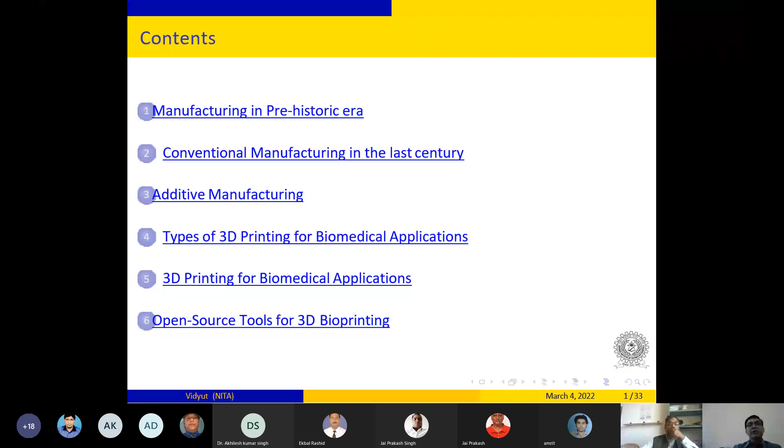So these are the areas that I will be covering. Now, let me go to the next slide. Next slide shows what? To a layman, it may appear that, yes...

I want to say, sorry to interrupt you, sir. Sir, if any of our participants have any kind of doubt, can they ask in between or at the last? No, I think you just note down things and we can have a discussion at the last, because we are having a time constraint also. So let me finish my part, then we can have a discussion as long as you want. Okay, yes sir, we will. Thank you.

Yeah, thanks. So to a layman, whatever I have presented here would appear to be a bunch of stones of different shapes. Yes, truly they are. But all these shapes that I have put up here were very, very significant if we go back a few thousand years.

Now, when man, what we call today as Homo sapiens, tried to convert from quadruped to biped, instead of crawling, they started to stand on their two legs. They were able to utilize their other two limbs, which earlier they used to crawl with. Now those two limbs had become free, and since this Homo sapien was physically weaker compared to the other animals present, in order to survive, they tried to utilize the other two limbs.

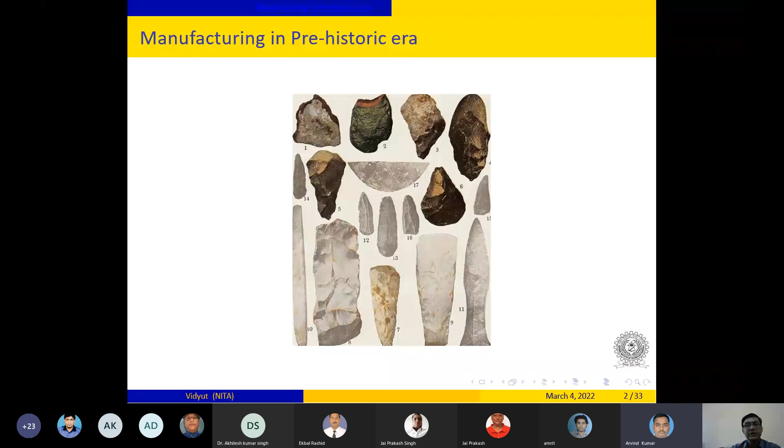Now today we know that bone is a natural composite, a God-made composite, and we are trying to utilize the technology of how bone is formed, such a wonderful composite. Knowingly or unknowingly, man realized during those ages that the bones of these animals could be used for their purpose. So the art of manufacturing had started from that era.

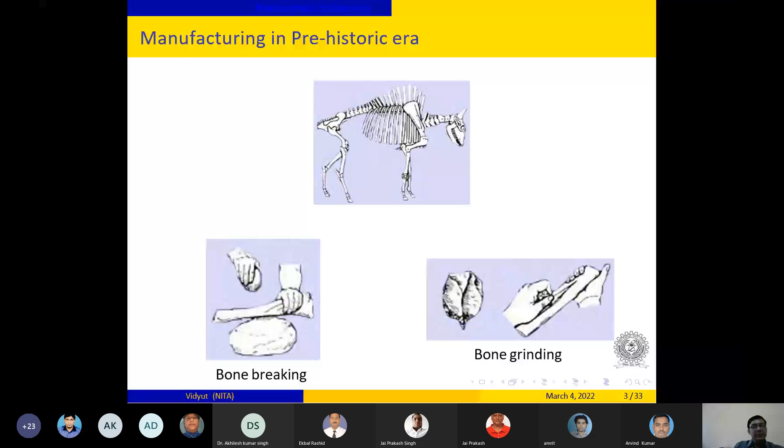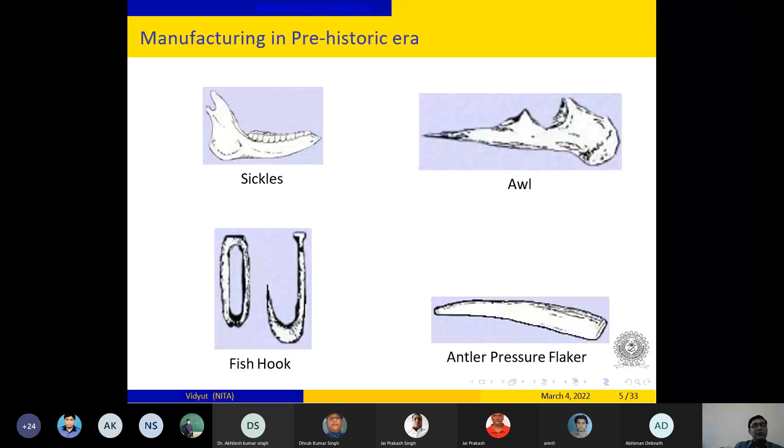Now, all this that we have talked about till now is something we have seen in the Paleolithic age. The entire era of our history can be divided into the Stone Age, which can be further divided into the Old Stone Age, the Paleolithic age, and at the end of the Paleolithic age comes the Neolithic age, where the rudimentary tools used in very crude form during earlier ages were now being shaped into better tools with the capacity to be made into different features or commodities. Here comes the end of the Paleolithic age, and then comes the Neolithic age.

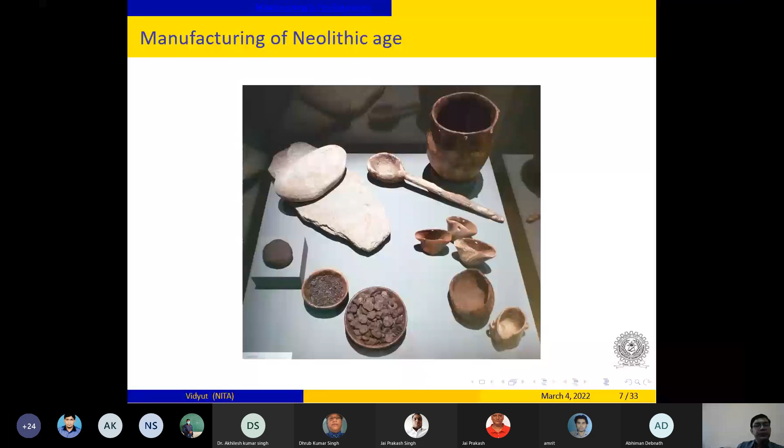Now, when they were using these potteries and using fire to harden them, somehow, somewhere, we do not know at the moment, but they have come across metallic ores, which might have looked like stones initially. When they were building fire, some of these stones might have melted and flowed. As we know well, man is very inquisitive.

He has the ability to think and analyze and question why it is happening, how it is happening, when did it happen. Since these questions were in his mind, he might have noticed and realized that there are some particular varieties of stones which, when subjected to heat, melt. And this molten metal again solidifies. This was the idea which he utilized into what we call modern day castings.

Now, in this slide, I have shown the first and most rudimentary shape of a metal casting. This is the amount of metal which might have accidentally melted and solidified into a crumb. So this is it. Now, then he started imitating that.

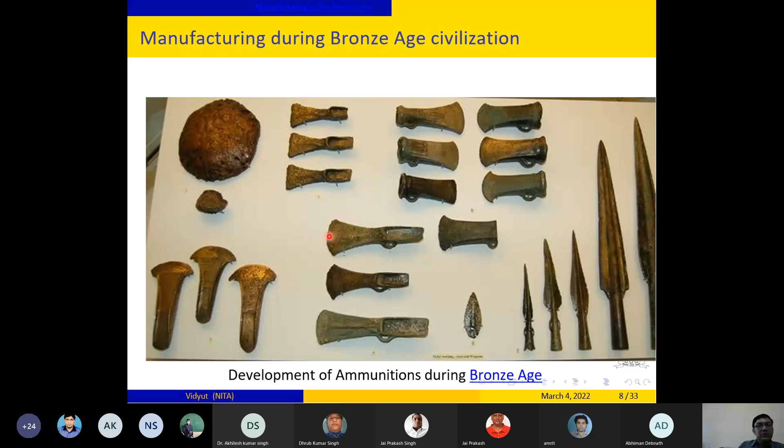Now, the casting of the Bronze Age would give way to wrought ammunition in the Bronze Age. That means after utilizing castings for thousands of years, he learned that the castings he used to make would break. So it was brittle. Somehow he found that if the castings were heated time and again and beaten, hitting, heating and beating, that is hammering, it becomes very strong.

And that is how he learned the art of making swords. I have a picture showing Bronze Age ammunition, how they used to make swords out of bronze. They used to be weaker than iron swords, but well, this is how they used to make them.

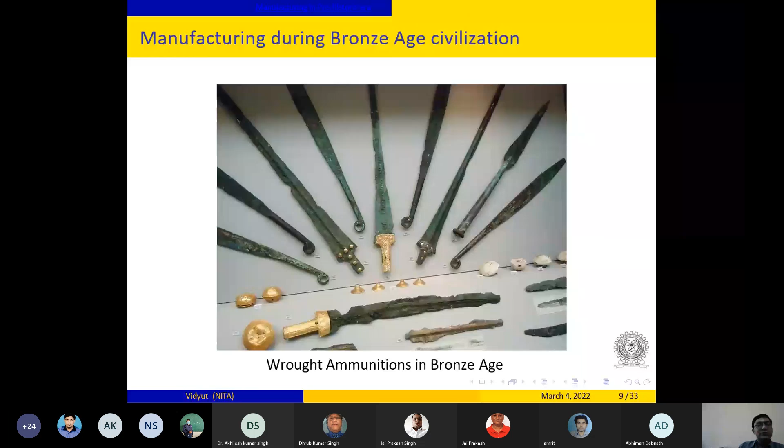Not only did they learn the art of making swords, but they also utilized metal for their own day-to-day purposes. What would be these day-to-day purposes? See, this is the day-to-day purpose.

So man is no more dependent on stones only. He has got the art of melting and pouring metal, and he has also learned the art of hitting the metal, and that is what we call forging. So slowly, if we talk in today's terminology, he has learned casting, he has learned metallurgy, because now he is not only using pure copper but has learned to make alloys by adding zinc and tin into it. That is how this is called the Bronze Age.

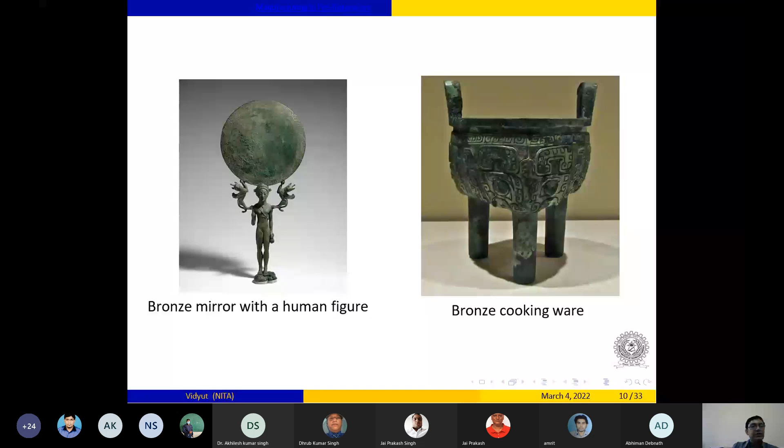Over those years, our country has also seen marvels in this casting technology. Where do we see this casting technology, in which form? Let us see in the next slide. This slide shows us two photographs. One is Kaliya Daman, a mythological story that we all know, which has been converted into a figure, cast as a bronze sculpture. Both of them are bronze sculptures - one is Shiva and the other is Kaliya Daman.

These date way back to 2500 BC, and if man could cast such a complicated Shiva statue out of bronze, you can imagine to what level the castings were available during that time. It has been said that India learned the art of investment casting, which we learn today in our class books, during that time. These types of statues were made using the famous lost wax process or investment casting, as we call it today. By this process, we know that very complicated shapes can be formed.

The Kaliya Daman that we see here is from the Chola dynasty, that is from Tamil Nadu. And the Shiva figure that we see here dates back to the 10th century AD, and this has been recovered from some part of Bihar, the erstwhile Bihar.

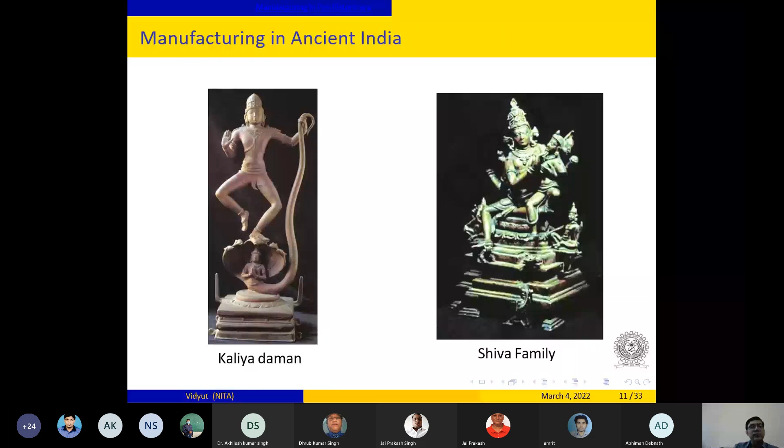Next, we see two statues: one of Lord Ganesha, another of Lord Nataraj. The Ganesha is from Kashmir, dating back to the 7th century AD, and this is again from the Chola period, around 1100 AD. That means from the BC era, before the Christian era, to this age, 1100 AD, so after that - how man has progressed from these mere stones to such intricate and complicated shapes.

Now, all of these are related to castings only. But as I said, casting is not the only technology that was developing. Along with casting, there were many other things developing, and one of that was forging. That means you heat something, cool it, heat it again, cool it, and when you keep repeating this, metallographic or metallurgical changes take place inside it, and it becomes very hard.

So not only was the man dealing with bronze and bronze related material, but he found another important material which is called iron, which was stronger, which was abundantly available, and he learned to tame iron as well.

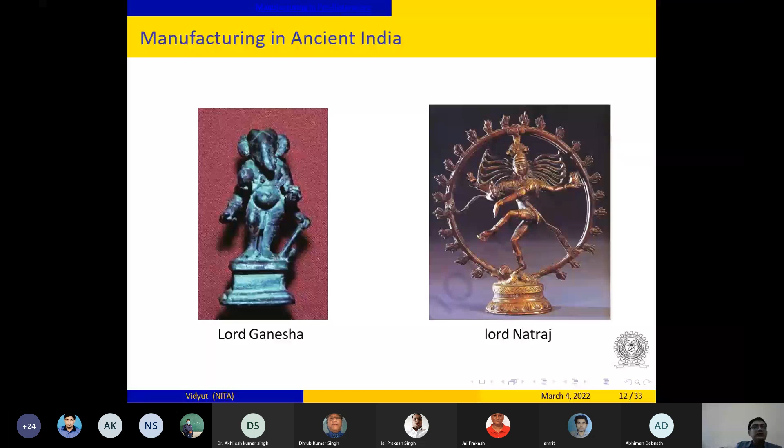Next, I'm going to show you something which people today still wonder about. What do we see? We see the famous rust-free iron pillar at Delhi. This iron pillar is said to have been manufactured during 400 AD. Till date, people are wondering that it does not have any rust. It didn't rust till today, and we know how polluted Delhi has been over the last 20-30 years. In spite of that, it is not rusting.

So people have done lots of research on this, and they have found that it has got an extraordinary corrosion resistance power. Over 1600 years, it did not face any rusting, though we know the temperature in Delhi soars as high as 45 degrees centigrade, and it is very cold as well, but it is still sustaining all these atmospheric atrocities, and it's still not getting rusted. So we Indians had developed metallurgy to the extent that we could develop something which was not getting rusted.

Apart from this, this is the most remarkable feature on exhibition to all people. But there were many such artifacts made which over historical time have perished, got lost, did not get prominence. But this one is still there. Now, lately people have studied the metallurgy of this type of iron pillar, and they have found that it contains very high phosphorus and absolutely does not contain any sulfur or manganese. It has got high quantity iron, and very high phosphorus without any sulfur and manganese, which is bothering the metallurgists.

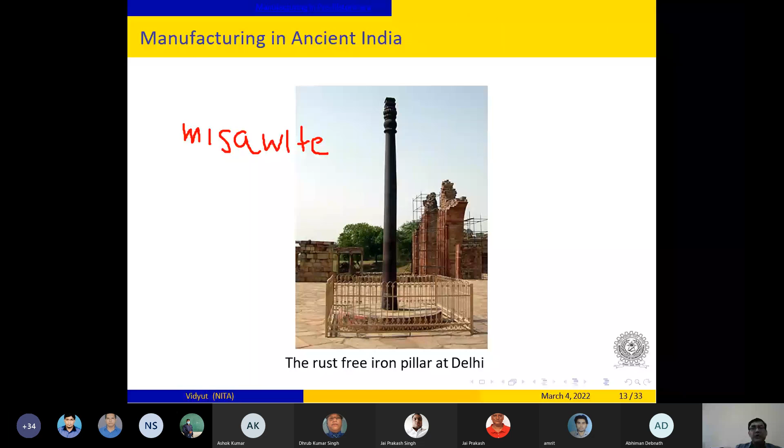Such a wonderful discovery to this date. But I wonder if the metallurgists of 400 AD had intentionally developed it so that it won't rust, and that is how it was made into a monument and kept. So definitely, it is not that we are only learning new things now. I can also say that we had learned things, we have forgotten them, and we are relearning them at the moment.

Now, having said all these things, let us slowly come into the engineering aspect and try to see things in the present context. So historical things we have seen, many things we have seen. Now in the present context, if we talk of manufacturing process, we can say conventional manufacturing process and unconventional manufacturing process. In conventional manufacturing process, we have the formative type, where we are melting metal and pouring it into molds of particular shapes, which takes the shape we popularly call casting. Next is what we call the subtractive type of machining.

What we do there is take initially a larger piece of material, then find that this is too large, too big for my purpose, and then remove material from it by machining, which we popularly call machining. But the prehistoric man was also doing the same thing - he used to take a big piece of rock, then with help of other rocks, chop it off and turn it into a shape which would be handy for him. Similar things he used to do for bones as well. That means the machining we do today with help of a machine, removing material - the idea was there in his mind during those periods also. Maybe he was not doing it with help of a machine, he was doing it manually, but material removal was there. Next popular process is called the joining process, fabrication process, which we popularly call welding and soldering processes.

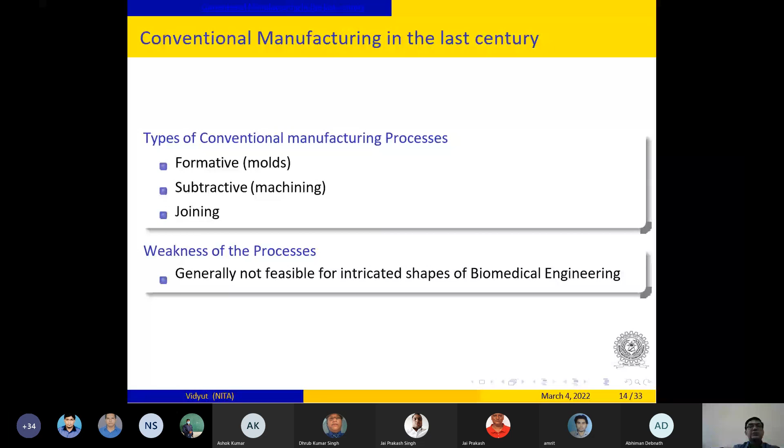Now, from the 1980s onward, we are developing another type of manufacturing which we call additive manufacturing. All the manufacturing we had learned earlier was conventional manufacturing, which was mainly subtractive. But now we have learned to make additive manufacturing.

Additive manufacturing means what? We will be starting from scratch - starting from dust, starting from powder - and slowly joining these powders together to make something big. So in manufacturing, we are going all the way around. We start from material, we melt it, and we make big things. That is one way out.

Next, we have a big thing and we are removing material to make it small. And then there is another way of thinking where we start from powders and convert them into larger things. That is what is called additive manufacturing.

Now, in this additive manufacturing, we will be developing these 3D structures layer by layer. That means as we keep adding one layer after another, slowly and slowly, a large thing will be built up.

Now, how are these additive manufacturing processes done? Well, there are different methods. These additive manufacturings can be done for metallic materials and for non-metallic materials. We will keep our discussion confined mostly to non-metallic materials, because non-metallic materials are easy to melt. In this process, melting would definitely be there, but not the way metal is melted for casting - here it's in a more controlled manner.

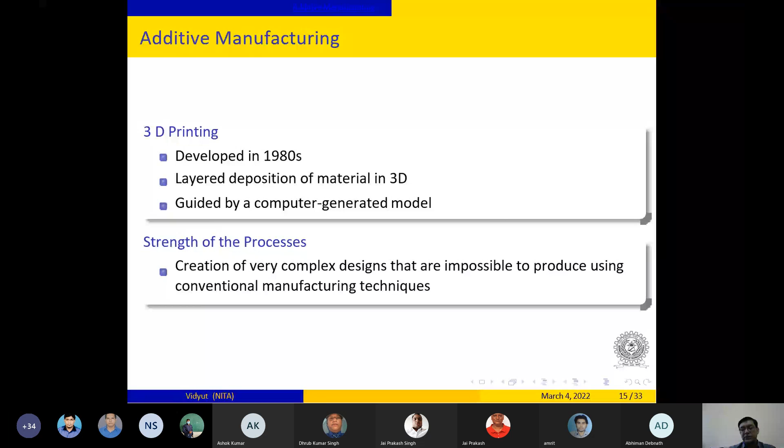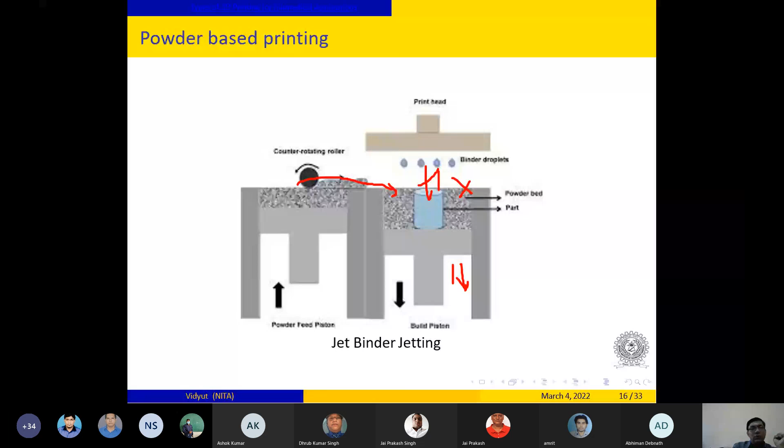Here, in this slide, we are telling that the powder itself can be joined not only with help of glue, but they can be heated and they can be fused. So what are the methods with help of which this can be done? The first method we call as thermally fused selective heat sintering. Thermally fused means we are using some heat, and with that heat, the powder material will be fusing together.

And this joining together is generally called sintering. So we would be sintering the material. That means sintering in what manner? Say I have got a tray and I spread the tray with powder like this. The entire tray is spread with powder and I heat the entire tray. Then the entire powder is going to solidify.

But I do not want the shape like this. I want the powder to solidify in this particular manner only, in the form of an L. If I want the powder to solidify in this manner, then I have to ascertain that the powder of this vicinity only is getting heated up. The rest of the powder should not get heated up. And that is how this powder is only going to melt or sinter together.

This is one way out. How am I going to heat it? Maybe I have to use a heat source. What can be that heat source? That heat source can be laser.

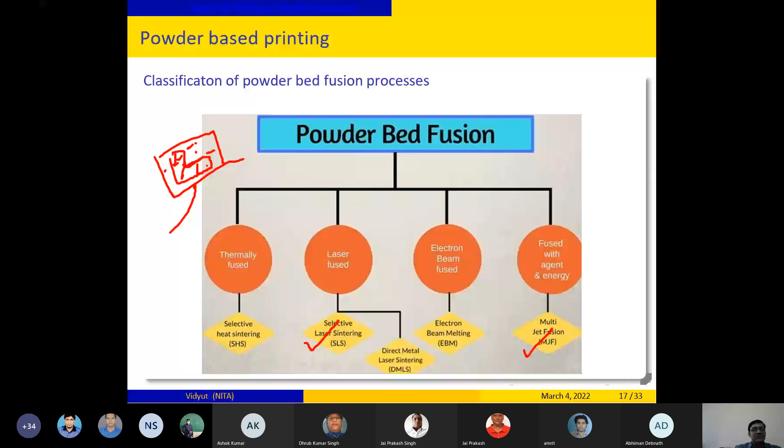Now, to give a more schematic input, we will take up selective laser sintering in a slightly more detailed format in the next slide so you can visualize what is happening. This is what is called selective laser sintering. What is there in this method? Similar to the method we had earlier seen, where we had used a laser head. This is the laser head which is going to give you the laser beams. Now again, we are having powder.

So this is the example of what we call selective laser sintering. In a similar manner, we can use electron beam melting also, but the only thing is that electron beam melting has to be carried out in a vacuum chamber.

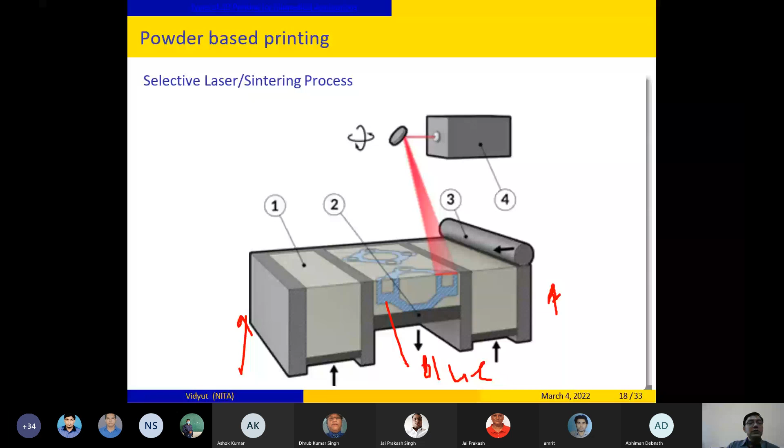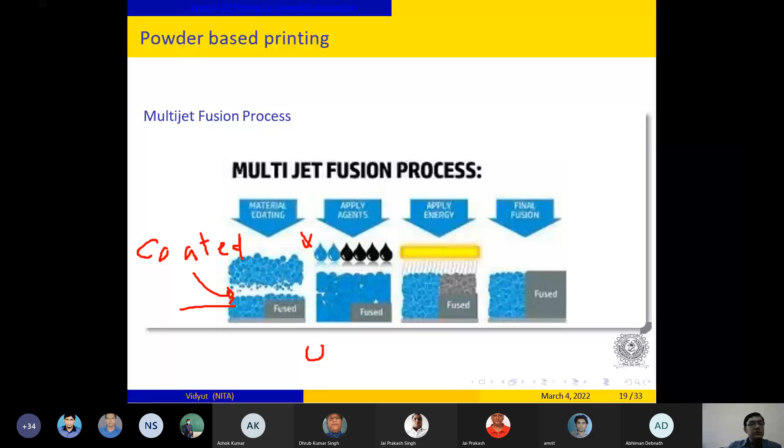Finally, to give more strength, we can use some energy, either heat energy or light energy. That means what we are doing here is getting into a curing process. So I can take adhesive coated particles, add adhesives to it, and then use some energy. This energy can be heat energy, or this can be light energy.

How does light energy join materials? Light energy is added so that a chemical reaction occurs in presence of light, and due to that chemical reaction, bonding takes place.

So we have a process where we use multi-jet onto these particles, and then with help of either heat energy or light energy, we sinter them, and that is how we get this fused block. This is the classic example of what we call the multi-jet fusion process.

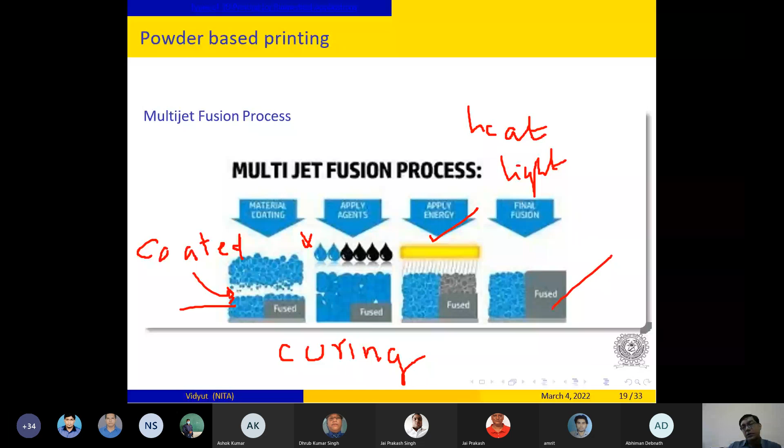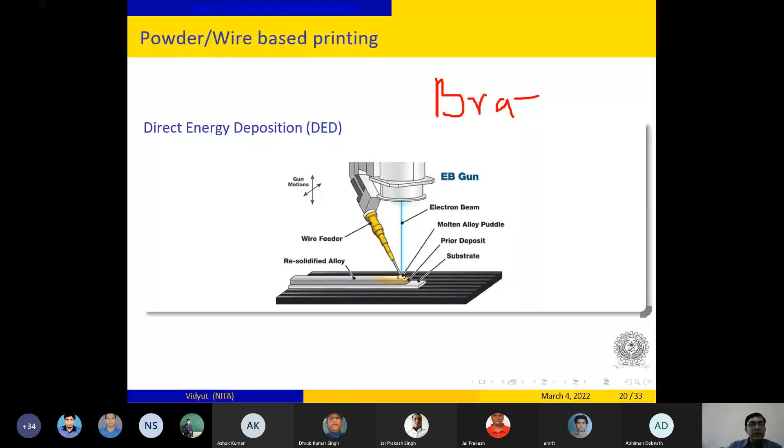If you have seen brazing, it is done in a more crude fashion. In brazing, we take a brazed wire, or we call it a brazed rod - a rod made up of bronze, in different combinations.

We take two mating surfaces, and keep that rod in between. Then we take a gun with oxyacetylene flame, and with that blow gun, we give heat to it. The brazed rod melts and fills into the cavity, solidifies, and holds the two parts together. That is called the brazing operation.

A similar operation can be done here, but instead of using an oxyacetylene fuel source of flame, we use a very precise and minute electron beam. This precise beam falls onto a wire, and the diameter of the wire will be very, very small.

It will be at the micron level, very thin. Also, it is important that the heat falls onto this wire, and the diameter of the electron beam that forms should be even less than the wire, so that the beam can land on a particular portion of the wire and melt it in a very controlled manner.

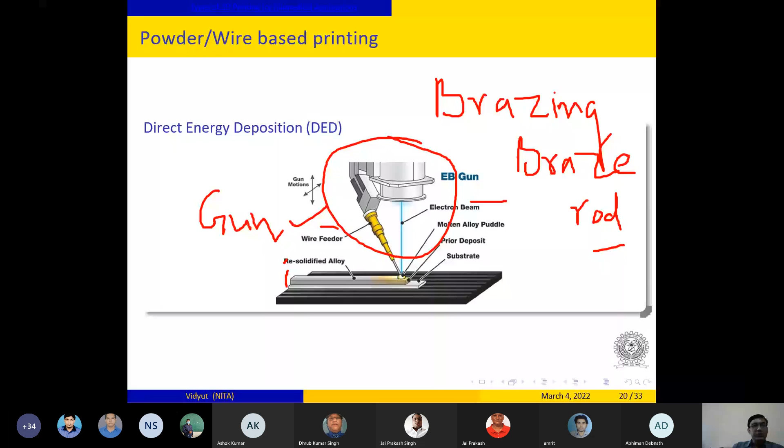So both of these are called direct energy deposition - meaning with the help of energy, whether you take material in the form of a wire or powder, it can be directly deposited onto a substrate, or without a substrate, built from scratch, layer by layer, by properly maneuvering the head to generate complicated shapes.

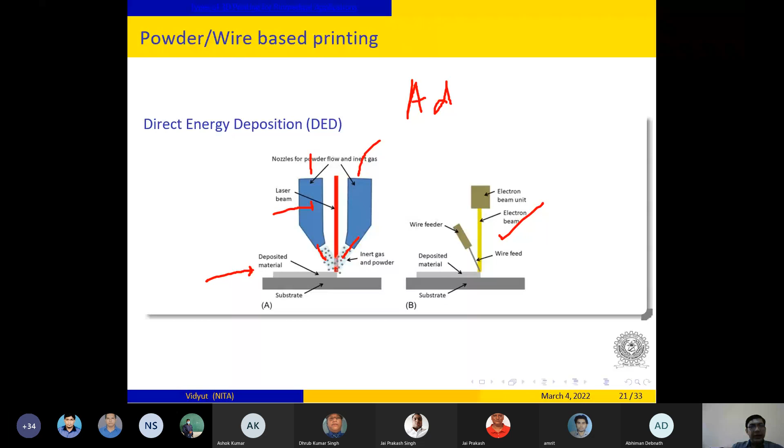If you do it with the electron beam, you can do it in an inert atmosphere, away from oxidation troubles. These are some of the techniques utilized in what we popularly call additive manufacturing - the name comes from ADDI, additive. You might be laughing at the way I write additive manufacturing.

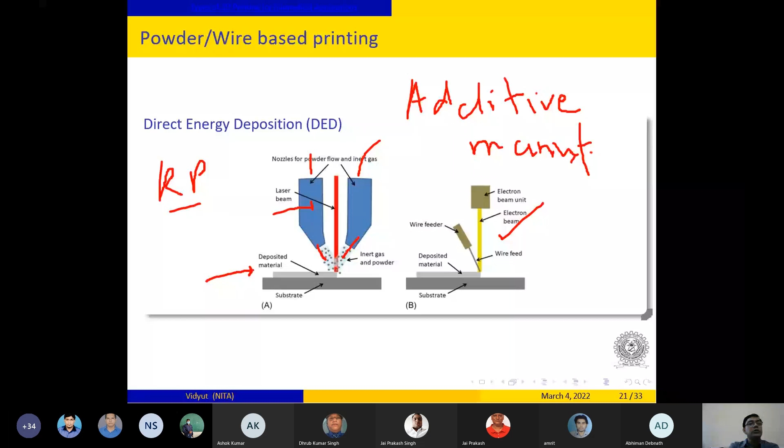Having gained knowledge about the basics of manufacturing from the prehistoric age to the modern age, we have come across conventional manufacturing, where we mostly use subtractive methods, to the latest one, additive manufacturing, where we add layer by layer. Now that we have gained so much knowledge, where are we going to use it? We are going to see how this knowledge and technology can be utilized for biomedical applications. Let us see.

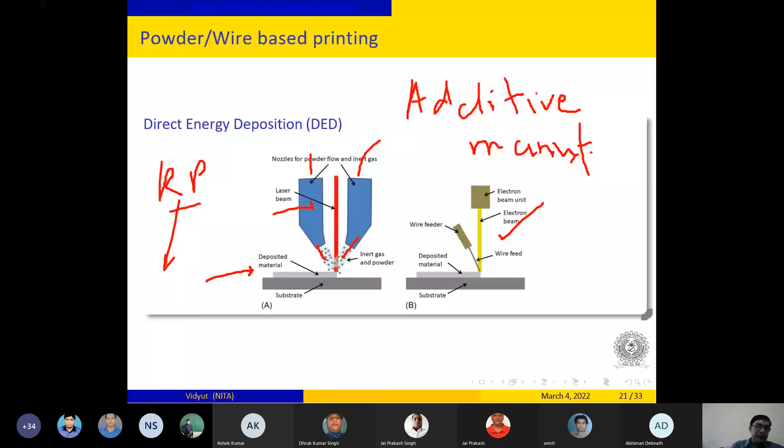If I want to print this slide that we are seeing here, we would switch on the printer, give a command, and the ink stored in the printer cartridge would be sprayed over the white paper such that wherever there is a dark area, there will be a line. Similarly, we get the entire sketch replicated onto the paper. This is called 2D printing - we get everything in 2D.

How about getting something which would be slightly elevated? That means one layer after another is going to happen, and then we get the real product. Whatever we get as a real product, we give it 3 dimensions - length can be drawn on paper, but we also have to give it height. So it becomes 3D. 3D printing has to be done.

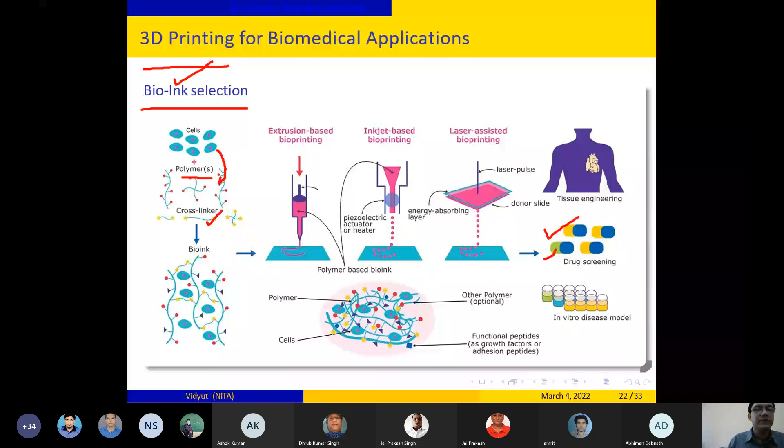Next thing is that, as I had been talking, we will be using the live cells. So when we are using these live cells, that means tissues, we are going directly into what we call tissue engineering. Say for instance, I have to manufacture a human organ. So definitely I have to use the live cells. But how am I going to bind them together? I have to use a biomaterial. And if I have to give it a particular shape, then again, what do I have to use? I have to use an RP process. All right, let us see how we are going to use that.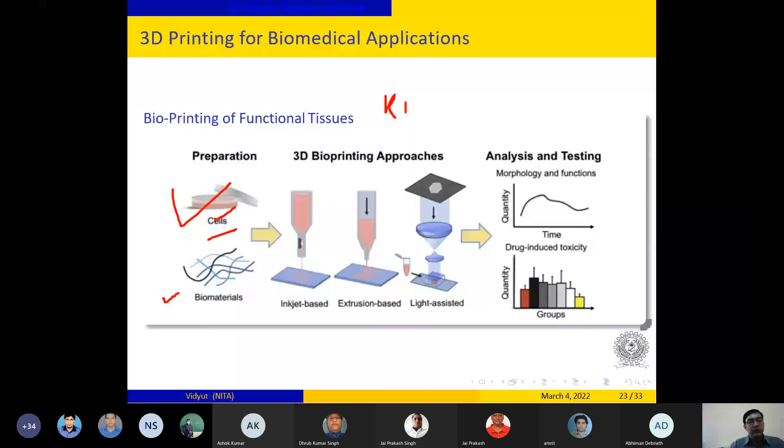This is the slide where we want to manufacture this organ. Let us say we want to manufacture a heart. So what we are going to do now? We take this heart and then we will be creating a 3D profile of that heart. How can that be done? This can be done optically, this can be done with help of MRI, this can be done with CT scan, computer tomography, magnetic resonance imaging, and also optically.

So we convert this into what we call a 3D CAD model. With help of this 3D imaging, we grab all the dimensions. Once all the dimensions of the human heart are known, I can generate a similar thing in a 3D CAD model. So I have a CAD model. There may be many tools, I'll talk about those in the next slides, but with help of those software, I can generate a 3D heart.

And then this is to be machined. Those of you who have taken courses in CAD/CAM know that in order to move the machine in a particular manner, we have to use G codes. So these dimensions would be converted into G codes, which will be utilized to move the head across.

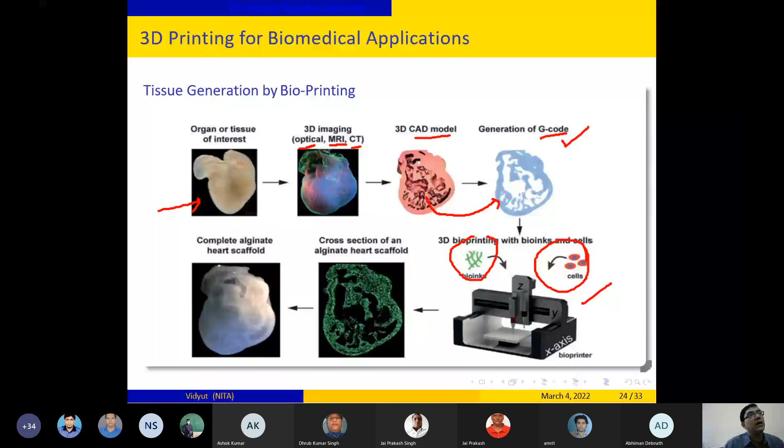I will show another slide that not only can an entire heart be repaired, which would be a very big thing to do at the moment, but definitely we can think of smaller components of the heart. Like if I need to make this particular valve for a portion, not the entire heart, but this valve, if it is metallic in nature, then there is a tendency of the body to reject it.

Even if I am using a material made up of human or animal product, there is again a tendency of the human body to reject it, because my body has a definite entity different from another person's body. So whenever I'm transplanting something, like I've borrowed a human part, the moment I put it inside my body, the body starts rejecting it.

That is the reason why patients who have kidney transplants have to maintain a very strict and disciplined life, because the body tries to reject it. It has to be made to understand, to accept it. But the same kidney, if it had been generated by my own body cells, the rejection rate would be much lower and would be widely accepted.

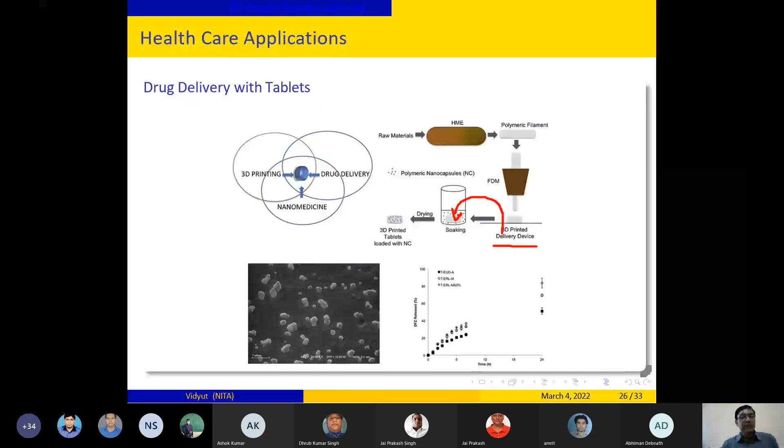Since we did not talk about FDM earlier, let me talk about it. FDM is a principle very similar to what we had seen earlier, that is direct metal deposition, DMD. FDM works in a similar method.

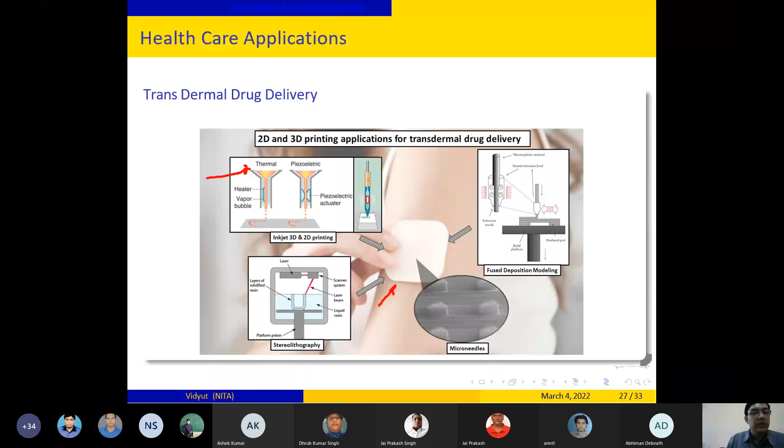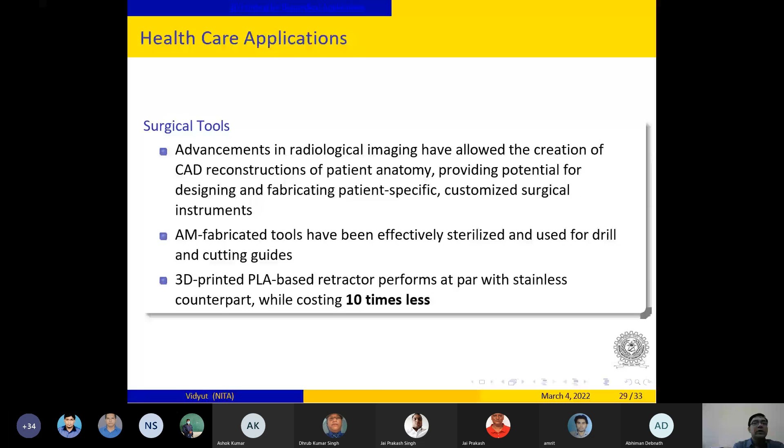Since many faculties and researchers would be here in this talk, I will give you an overview related to some open source tools for bioprinting. We should be doing away from the use of pirated software. I often tell my students, if we don't have money to purchase genuine or proprietary software, let us not purchase it. Instead let us use open source tools so that we are on the safer side. Maybe those are not very handy, but we are keeping ourselves safe. With this motto, in the last few slides, I will give you information about open source tools for 3D bioprinting.

I have given the first two sources, RepRap and TurboSquid. These are websites one can always refer to, with plenty of information. RepRap stands for replicating rapid prototyping, and it is accessible to small communities. Anyone can utilize these in the developing world, like India, where we don't have much money to purchase proprietary software. We can use the free software available on RepRap and TurboSquid sites. These are all open source, licensed under GNU General Public License, so there is no harm. Anyone can use them, and you can even frame the machines.

The next ones are NIH 3D Print Exchange and Thingiverse. Both are open source, with huge online databases of 3D models. NIH is especially for medical applications, with medically applicable models available. If one is interested, one can go into this, see the models, and develop things of their own.

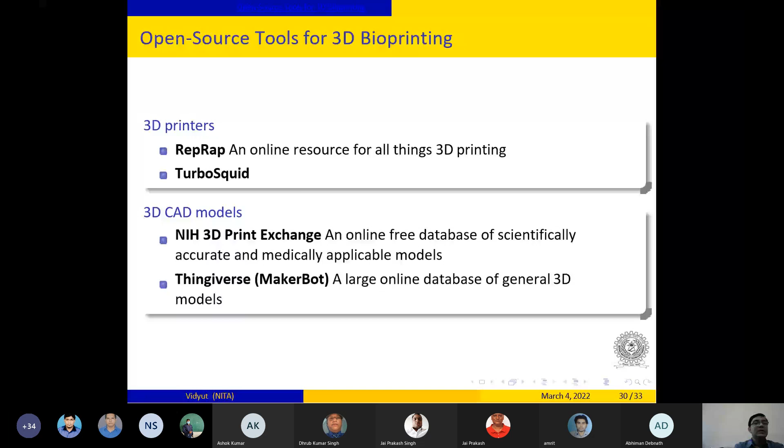Next, I'll give you a small photograph about this. This type of machine can be made very cheaply with the help of those websites. Lots of information is available there that you can utilize. You can buy these motors and other parts very cheaply, and develop a machine of your own at very minimal cost.

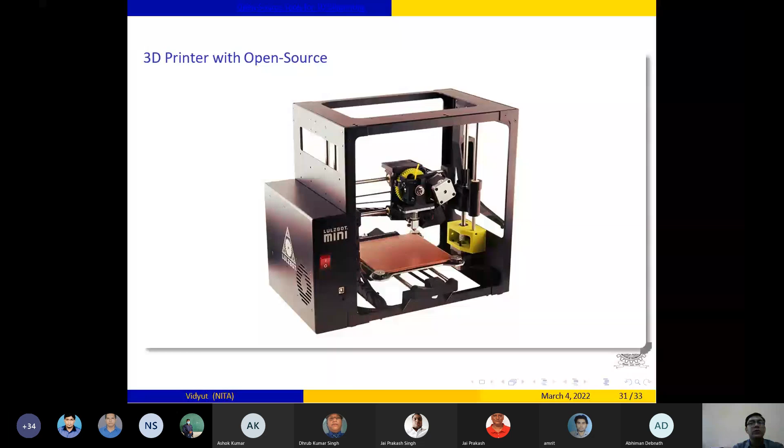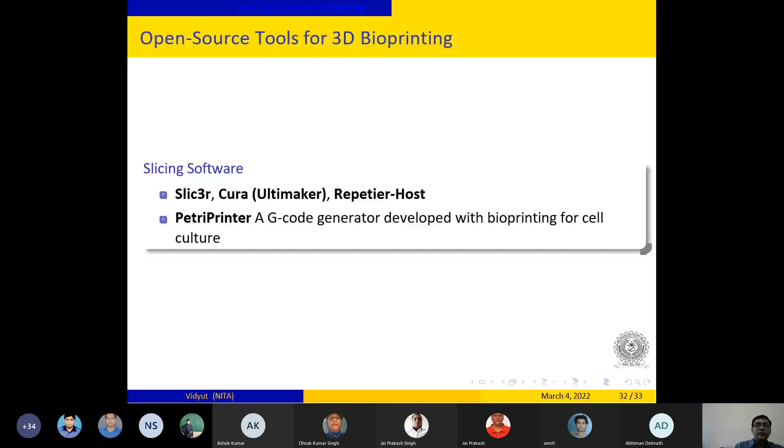So that's it. I tried to give you information regarding the history of manufacturing, moving on to different types of conventional manufacturing, and specifically 3D manufacturing and its applications in medicine. I've also given you information about free softwares you can use for your purpose. That's it, thank you.

Thank you for giving me the opportunity to speak to you. I know there are many learned people in the audience. I have tried my best to give you information that can be helpful. It's not necessary that this will be attractive to everyone, but there might be a few interested in these areas, and many already know this. For them this might have been a repeated session, but that will always be the case in a big audience. Thank you.